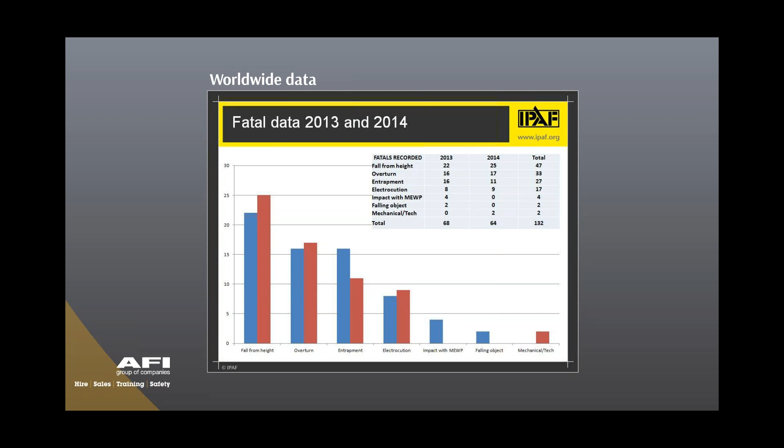Drilling down into the data, you can see that on entrapment, the biggest issue was on 3B, or mobile type booms, so it's probably no surprise to you. The next one is 3A, sort of mobile vertical, or what we commonly know as a scissor lift. And we had an issue, a couple of issues, on a 1B, a static boom. There's one there to be confirmed, so I'm not sure what that was.

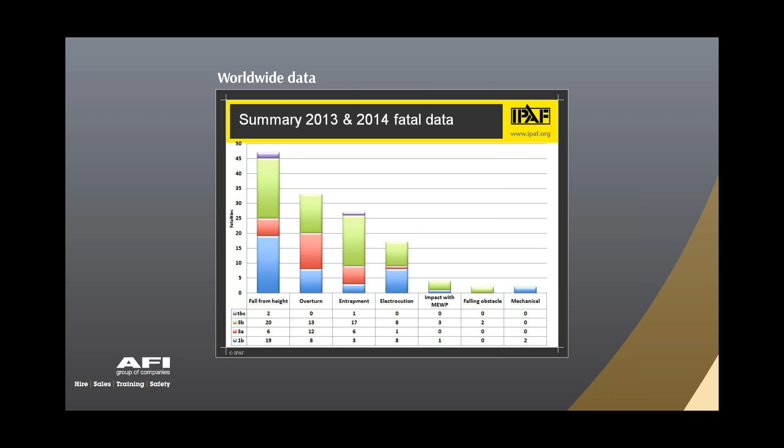But again, if we look to the left, still the biggest issue is falls from height, predominantly from boom type platforms, both mobile and static, and a number of overturnings. So albeit we have big issues with entrapment, there are certainly other bigger issues in terms of falls from height and overturns. But every one of them is obviously a catastrophic day and a changing of lives.

Okay, so just a little bit about the regulations we have to adhere to here in the UK. PUWER and LOLER. PUWER requires that the work equipment provided is suitable for use. Now employers have a duty to identify potential groups at risk. We have a lot of very experienced people in this industry who use MEWPs day in, day out. And equally, we have a lot of people very experienced in their trades who use MEWPs on an ad hoc basis, maybe once a week or once a month.

Who's more at risk? You may want to ask this later, but in one sense you could say the guy using the machine every day, a steel erector for example, is going to be more competent, but he can also be more complacent because 'it's never going to happen to me.' Even recently we've had an incident with a steel erector on a boom type platform fitted with a secondary guarding device. So there's no golden ticket that's going to get you out of this. You need to be more aware.

But we know the employer must carry out their risk assessments, and we need to ensure that any risk created by the use of any equipment, the MEWP, and the location where we are, is protected by a combination of guarding, protection devices, warning devices, and of course safe systems of work, training, and risk assessments.

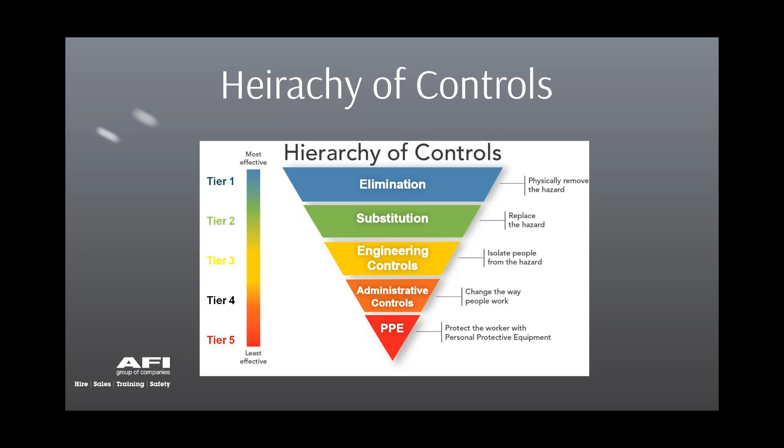So tier 1 and tier 3, I will discuss these a little bit later on.

I mentioned some guidance, and this guidance from the Strategic Forum Plant Safety Group is the document on the left there, freely downloadable from many websites. It's a very practical, helpful and easy reading piece of guidance. Part 1 is for supervisors and managers and those looking after and particularly selecting people for working up in the air, whereas Part 2 is more tuned to looking at rescuers and operators, those who are working in the platform.

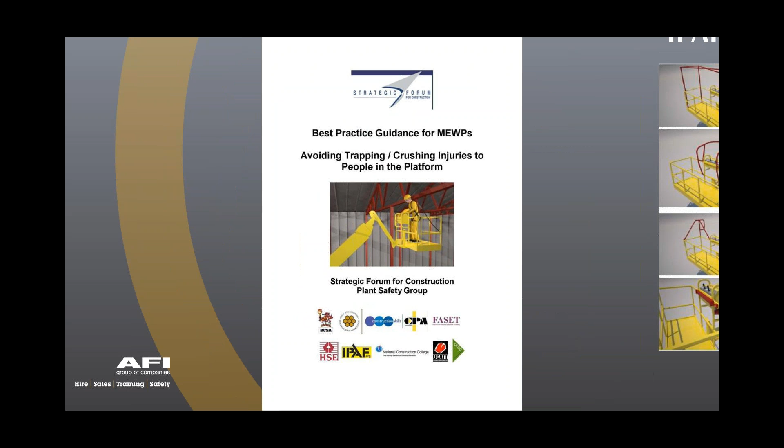IPAF themselves have produced a number of other documents which you'll find on their webpage under the resources and technical guidance notes section. I would encourage you to review these. Here's an example of one of the guidance documents they've put together, because we have to let people know what these are about. These will again be available at the end of the presentation.

I'm just going to bring to your attention an incident which happened over at the Boggabri coal mine in New South Wales, Australia recently. This happened in 2014, at a partly constructed steel building, and the report was issued in 2015. I think this is testament to the work of the Mine Safety Investigation Unit, that they've investigated or partially investigated this so quickly. We see too often in the UK where it takes four or five years before we get any sort of tangible findings from incidents. Unfortunately, by that time we've put a lot of people up in the air and used a lot of equipment, and it could happen again.

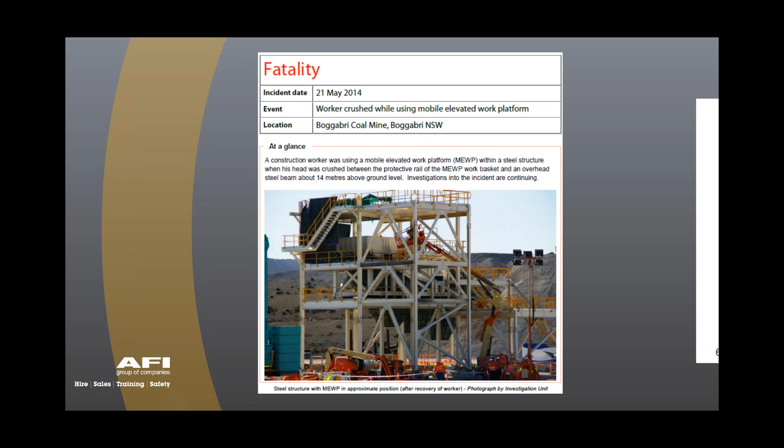So this picture here shows the aftermath of the incident, and you can see the platform around about 14 meters up in the air. As it says there, investigations are still ongoing.

Here we've got the basket after it had been released, and you can see these two beams here, which is unfortunately where our deceased worker was fatally injured, as you can see there.

So basically the operator was tightening bolts up inside the steel structure. A mobile compressor was at the base running air lines up to the landing platform just below the MEWP. Flexible hoses were then conveyed up to the platform, and he was using a heavy pneumatic impact wrench. The contractor themselves had instigated procedures, and they'd insisted that a spotter was put in place to control the identified risk of being crushed between the MEWP and the overhead structure.

Now, at the time of the incident, the deceased was last seen standing in the MEWP basket with a small distance between the deceased's head and the beam. Shortly afterwards, unfortunately, the deceased was seen with their head caught between the steel beam and the safety rail at the front of the platform. All right, so this is this bit here. Forgive my drawing there, and their head was caught in there.

Now, it is appropriate to state that I'll just clear this. It was appropriate to show you the position of the worker at the time.

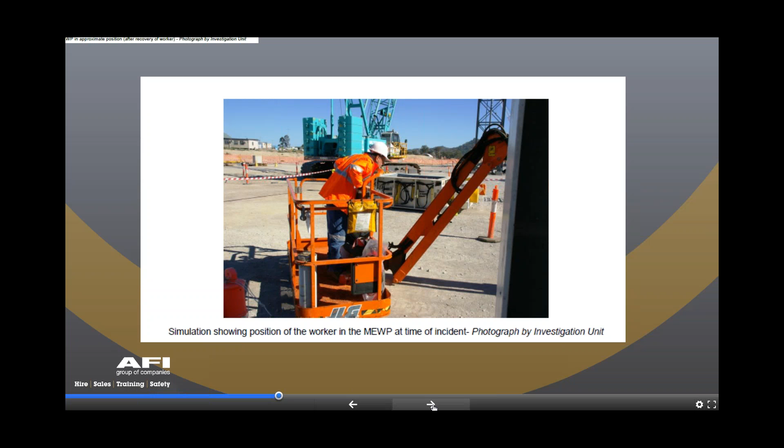So let's go on to secondary guarding devices then. There are two main types of secondary guarding devices available for boom type MEWPs: physical and pressure sensing devices.

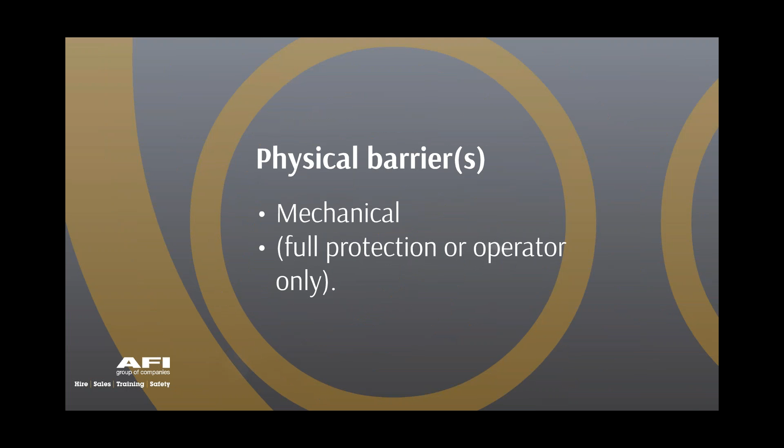Physical devices give full protection for either the operator or the whole platform, and that's what we call a mechanical device. Whereas the other type is pressure sensing devices. Now there are two types here: electronic interface and electronic. Those two devices are quite simple, quite straightforward.

So, mechanical secondary guarding devices. If we remember what we talked about earlier, tier 1 being elimination, this is what would be considered elimination: a steel structure that prevents the operator from being crushed. Simple, strong, extremely reliable, they can be reused, and these devices generally project above the machine platform to protect the operator from crushing, which can obviously still lead to serious or fatal injuries.

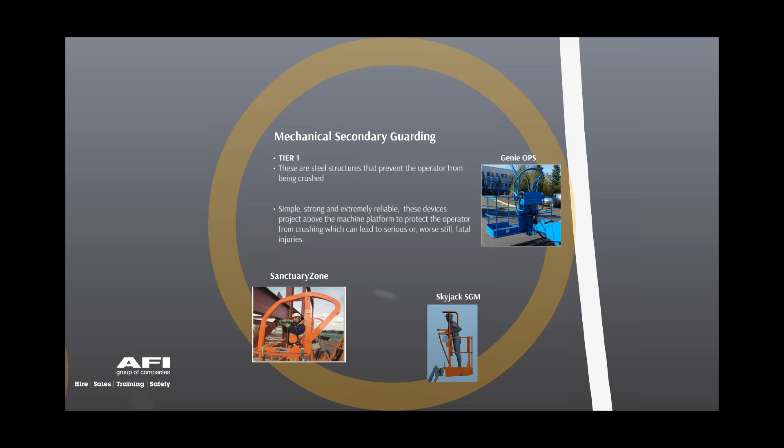Most of these, with the exception of Sanctuary Zone, have been designed by the MEWP manufacturers themselves. We've got two manufacturers that have seen the benefit in designing a tier 1 device. Again, if we look at the hierarchy of control, these prevent the crushing. The advantage, like I said earlier, is they are strong and there's no electrical interaction with the machine. The only downside is that you're adding a little bit of weight to the platform, but what's that when we're taking into account something which protects him?

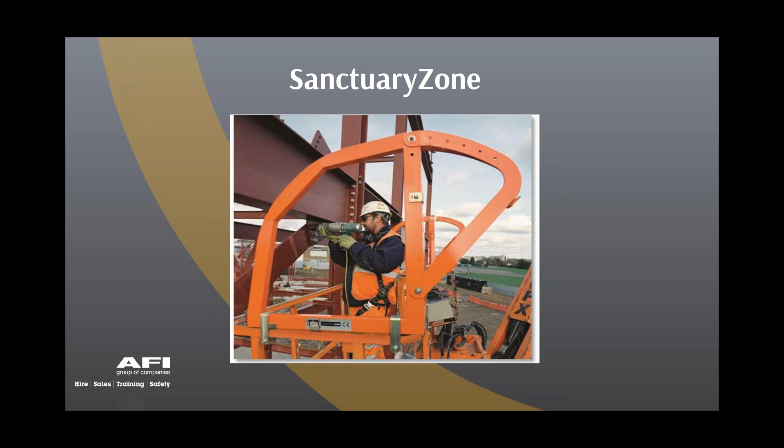So you can see a steel beam there, right? You see the operator working. You can just imagine the similar incident that I've just shown you in the mine, and the guy's leaning forward, looking where he's going, and unfortunately makes contact. The Genie OPS, or operator protection structure, simply there, that's for the operator only, so he stands inside his own sort of enclosed area. And the Skyjack SGM, Skyguard Mechanical, you can see a similar sort of thing. The picture only shows it from sideways, but the same principle applies, it's very similar, just in a different design.

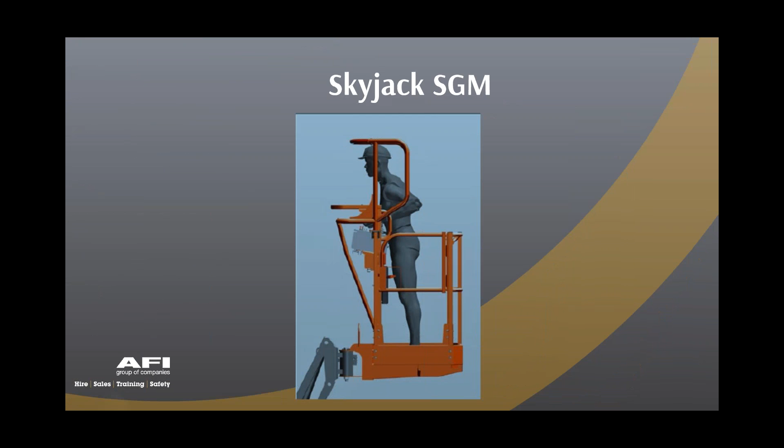So tier 3 now, we talked earlier about this being engineering control. These are interactive types of devices which will react to a crushing scenario. The operator themselves is pushed onto a bar which either stops the function, or auto reverses the last operation. Sometimes we have a fixed bar, sometimes a movable bar. These will not always preserve the physical integrity of the operator. Depending on where we're going, we still have to be forced onto this bar for the thing to work, so we're going to sustain some injuries.

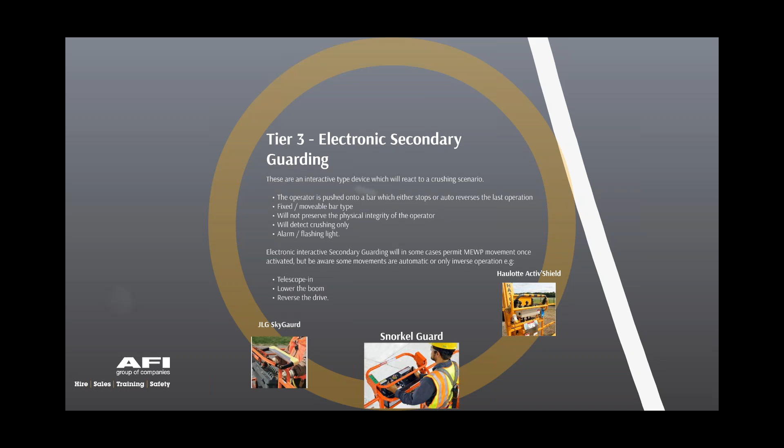These will detect crushing only, and in these scenarios the machines will either raise a sound alarm or have a flashing light. Flashing lights do vary - sometimes it's underneath the platform, sometimes at the base. Now, electronic interactive secondary guarding will in some cases permit MEWP movements once activated, but we have to be aware that some of these movements are automatic. So if I'm reversing back and I strike the bar, it automatically drives forward. But sometimes they will only do the inverse operation, the reverse - so if I'm lifting up, it will only allow me to lower down.

So we can see the JLG Skyguard there. It's activated by approximately 23 kilograms, or 3.6 stone, of force, and this will stop all function use at the time. After stopping the machine, the control system automatically assesses the functions in use by the operator at the time of activation, and for a short period of time is able to reverse that sequence.

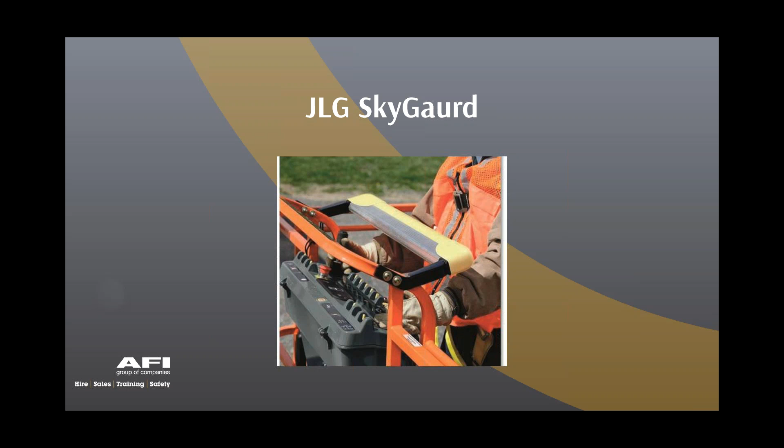Active Shield by Haulotte. This alerts the operator to potential crushing and features a safety gap that can protect the operator from entrapment over the controls and potentially allow them to get out of danger. Following the alert, only reverse or lowering movements are permitted. So that's what we talk about in burst movements, allowing a possibly panicked operator to get out of trouble without making the situation worse. After it's been triggered, the system is then able to reset and be reactivated from the platform.

Snorkel Guard, this is the latest device that's been released, and Snorkel actually contacted me when they heard I was doing this webinar - they were very, very keen to promote this. It's designed by the in-house Snorkel engineering team. It's simple, a mechanical system that features a spring-loaded rail that sits above the upper control panel, which cuts out machine operations when compressed.

So basically, this is for when an operator is pushed against the controls. The operator can override Snorkel Guard using a switch in the platform, and in the event that it's activated in error - say I've leant on it - I can just reset it. Now it's my belief that Snorkel are one of the only manufacturers to introduce this type of mechanical system as a standard feature on their new equipment.

All right, so tier 3, now known as electronic secondary guarding. So we've had electronic interactive, now I've got electronic secondary guarding. This works by the operator being forced onto a bar or a sensor bar, which in turn stops the MEWP. Now the MEWP is in some cases unable to reverse the last operation, meaning rescue from the ground is the only option.

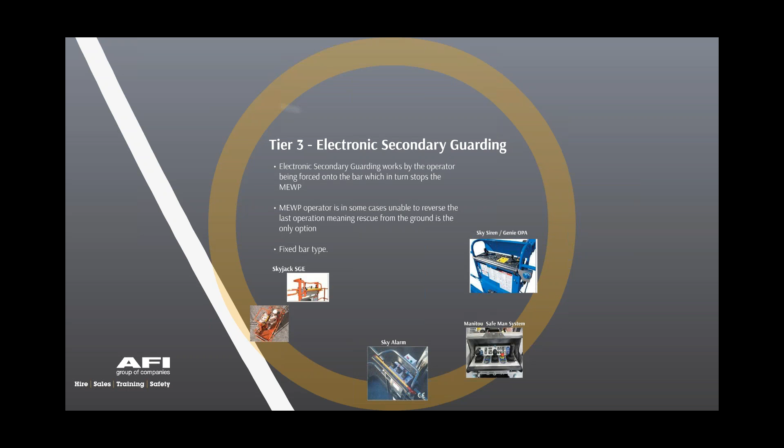And of course, this being probably the most sensitive of the devices, it can lead to false alarms with some machines. So basically I've turned around, I've not isolated the machine, I've rested on the actual control, and as you can see from some of them, they are very easy to trip.

Okay, so the SGE system features a sensor bar that when pushed instantly stops all machine functions, initiates a siren and a high intensity flashing beacon. If the bar is released within a second, the siren and beacon will cease and the selected function can then return. But if I apply it for more than a second, they will continue to operate and the engine will stop, halting all functions until the machine is reset. So completely different to what you've just seen on the interactive devices.

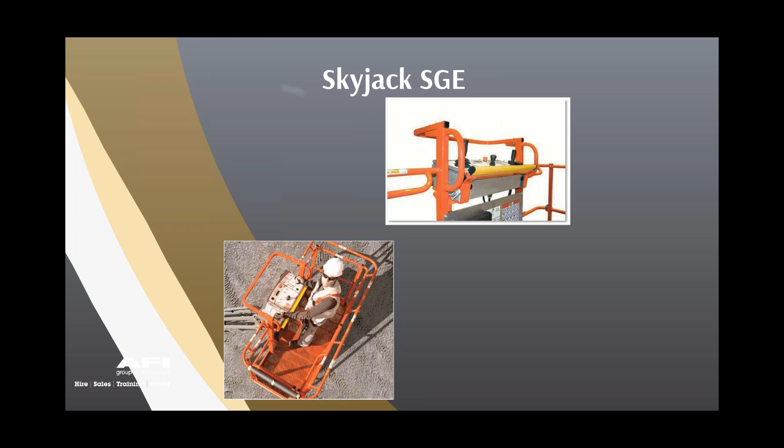The Genie OPA, or Sky Siren, this system was designed to be as unobtrusive as possible and features a pressure-sensitive horizontal bar that is fitted at waist height below the control panel. When pressure is placed on the bar, the system is activated. As you can see, there's a reset button that can be pressed if the system is inadvertently activated or touched in error.

Now, this system can be retrofitted to any Genie articulating or telescopic boom lift manufactured after 2002. So if you've got any platforms that are older than that, unfortunately this cannot be fitted to it.

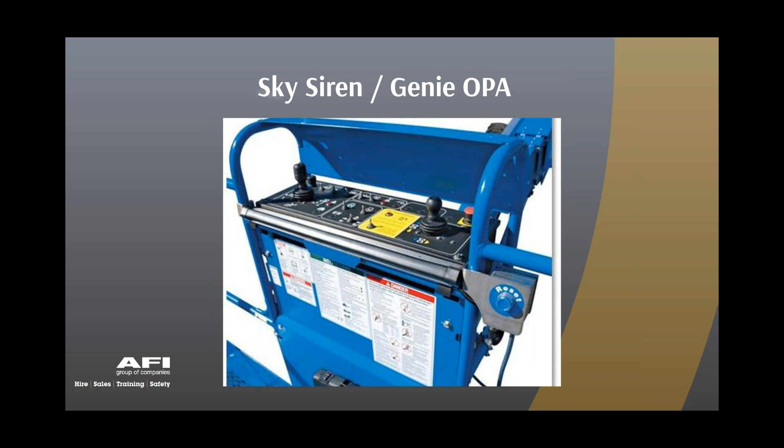Sky Alarm, designed by another rental company, and you can see that here. All right, so a bit like a black strip there going along it. Okay, and you can see that protrudes even further than the last one. And Manitou's Safe Man System. Okay, so again, similar sort of black strip there at the very bottom. Okay, so you can see there's 4 different types there. We've got 3 different types of electronic interactive, and we've got 3 different types of mechanical. So we've got the tier 1s and the tier 3s.

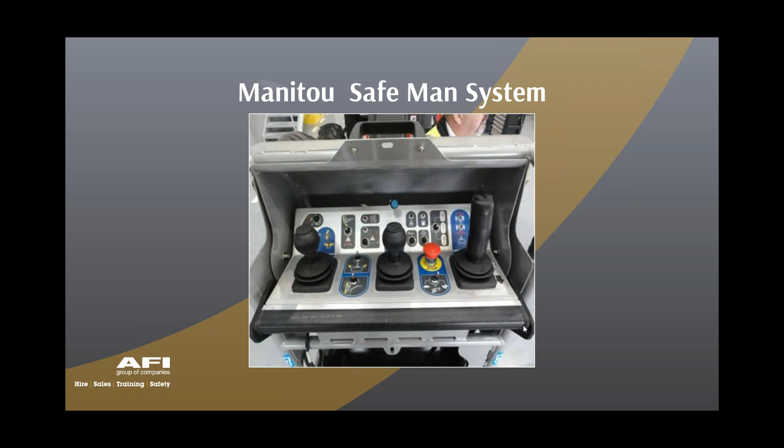Okay, moving on now, we've also got another type, which is the electronic control panel detection type. And Niftylift themselves brought out SiOPS, Sensitive Intelligent Operator Protection System, took it to a different level, and the whole panel itself will move down. So if I'm forced onto that panel by striking something behind me, that's going to force down and prevent me from hopefully being crushed.

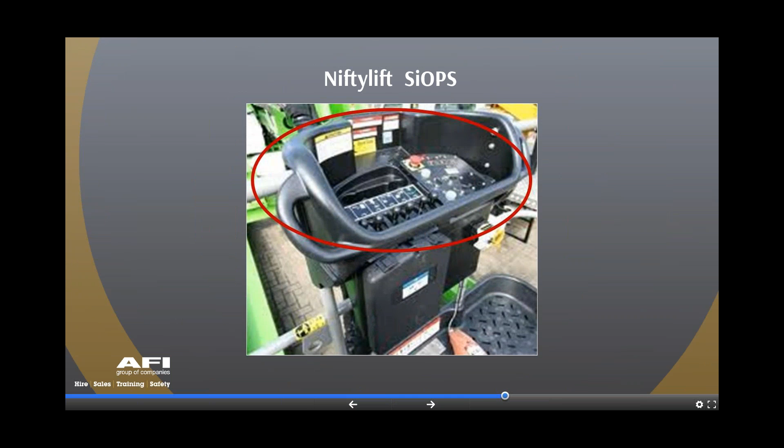So some of the secondary guarding devices and equipment that I've just shown you there are fitted to the MEWPs by the manufacturer during their MEWP assembly process. Some of them are standard now, you can buy them. And as such, these are an integral part of the original machine design and certification.

I have found principal contractors wrongly assuming that they can fit a SkyGuard to a Genie, or an Active Shield to a Skyjack. You can't do that. They can be fitted to manufacturer machine specific only. The only device which has multiple manufacturer approval is Sanctuary Zone. Only device, okay? So just be aware of that.

You might favor one, and I'm not here to promote anything. I'm here to tell you what these devices are and what is available. They might well favor one, but you go and hire a machine from a rental company and you might not necessarily get the same device again. So there's issues with familiarization, rescue potentially, those sort of things.

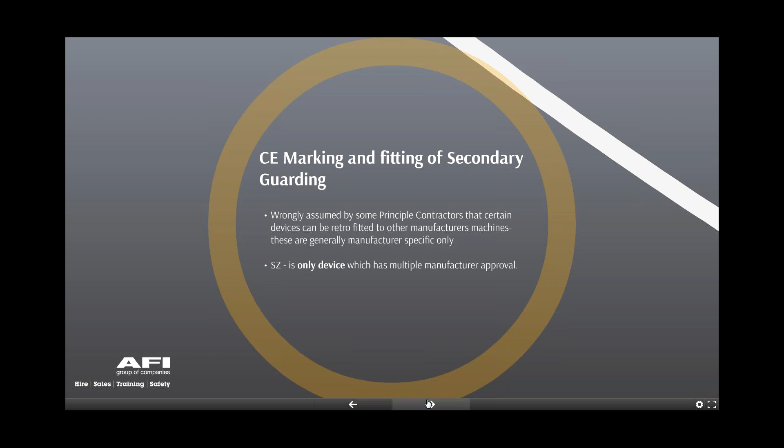So guidance is available in terms of if we actually fit an additional device to an existing machine. So it is recommended that those intended to fit or use a device refer to the Strategic Forum Plant Safety Group on Part 1, Section 6, fitting additional devices or equipment to MEWPs. And it talks about risk assessments and the legal requirements, the machinery directive, provision and use of work equipment regulations.

We've got to have signage and decals to tell us what's what, etc. So not going to go too much into that, you'll be pleased to hear. But once we've fitted this to this machine, okay, you're taking responsibility. So certainly as hirers, I wouldn't suggest any of you start fitting these things to other machines unless you've had specific machine approval. And obviously, ensure you've got it from the rental company.

So uses of secondary guarding. Okay, so let's not forget what we talked about earlier. We have the Health and Safety's Field Operations Directorate. Basically, if they see a potentially crushing scenario which is not being effectively managed, they can obviously look at prosecution, and clearly that might be, for example, fee for intervention or something like that, or even prosecution itself.

So some examples of where we would potentially need secondary guarding. The list potentially could be endless, but clearly when it's client policy or part of somebody's group practices. For example, UKCG has just become Build UK. UKCG, very good at putting together documents, okay, and they put together the MEWP toolkit. So we've got examples of what they would expect their supply chain to adhere to

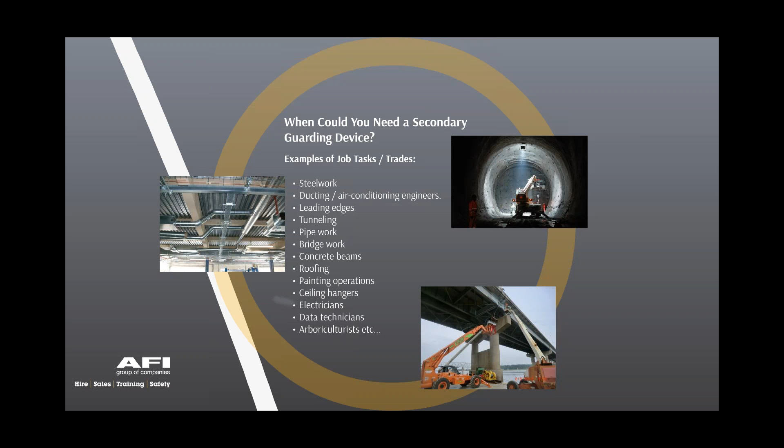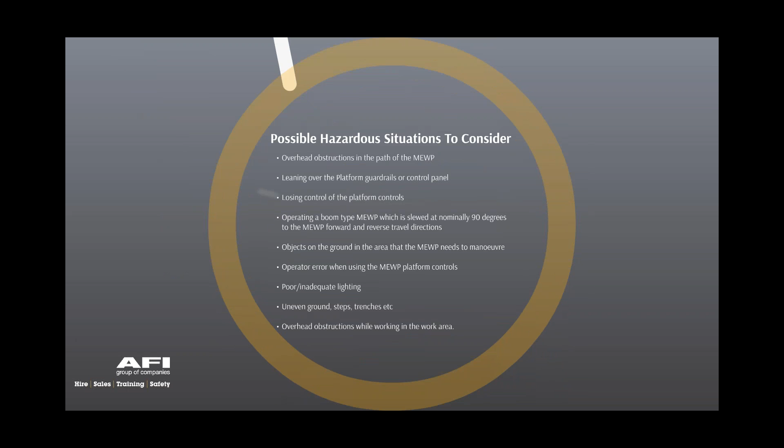So if we look at the Boggabri coal mine incident that I mentioned earlier, they came up with some recommendations and potential hazardous situations, but certainly things that we need to look at here. So for example, when we're looking at overhead obstructions in the path of the MEWP, potentially not looking where we're going, spatial awareness, we don't understand the dynamics of the machine, etc.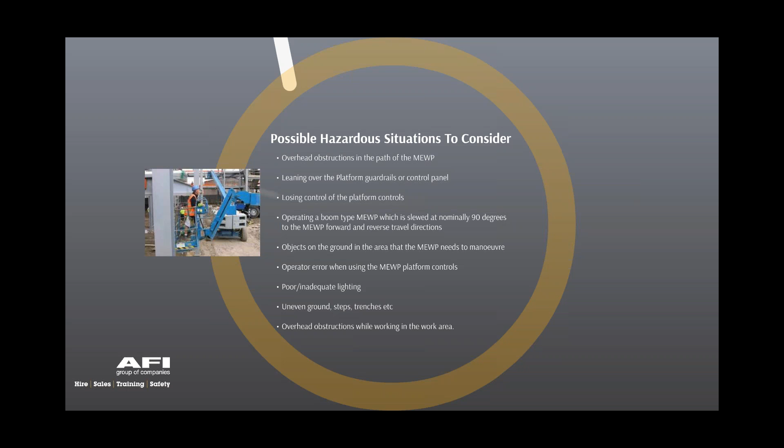So if we take into account looking down, operator error, operating the wrong control, not being able to judge distance, situational awareness, as you can see in that picture there, other platforms working, cranes, fork trucks, etc. What if I've got beams or steel work or ducting, etc. I've got cables, I've got various things in the platform, and even situations here where the operator on the left or on the right has to lower down to a safer height to clear obstructions, but often they'll just travel elevated and hopefully they'll get away with it.

What about disorientation? So operating the machine 180 degrees to the chassis. So I'm the wrong way around. So normally 90 degrees slewed in the opposite direction. I operate forward and the machine travels in reverse.

Objects on the ground in the area the MEWP needs to move. So I have to drive over something or clear something. It could be a curb, a 4-inch curb. It could be a block. It could be a piece of timber. Lighting inadequate, obstructions overhead whilst working in that area.

One thing I'll mention there as well is ramping up and down. Okay, so what if I forget that machine's got a ramping time? So ramping up and down and not getting into the right area, slowing down, and it moves actually faster than I realised.

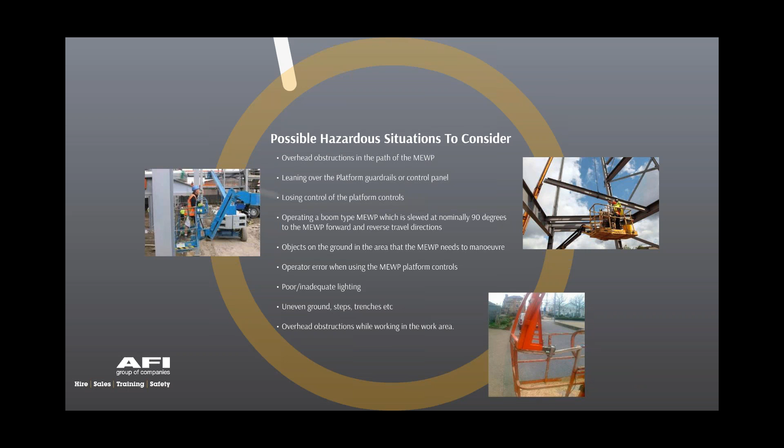All right, well, the safety manager from there said to us, I don't care what damage we do to your platform as long as my operator walks home, and he's more than prepared to pay for the damage there. In this scenario, it wasn't the operator's fault. It was the boat that moved, okay, and it made contact with the actual corner of the platform, as you can see there, bending the platform guardrails in. Very lucky man.

So as previously noted, we've got quite a few secondary devices that are out there, all right, but the HSE and the Strategic Forum Plant Safety Group have actually stated there is currently no one particular secondary guarding device that will prevent entrapment in all known circumstances. So there's no golden egg here. You haven't got one device that's going to stop you in any known potential incident.

So therefore, the following 5 points should be considered as part of a risk assessment process, to assist employers in selecting the most appropriate secondary guarding device. Reasons for selecting the MEWP for the intended work. Foreseeable entrapment situations. Different types of secondary guarding devices available, their suitability and their compatibility with the selected platform. Additional hazards, compared against the potential benefits that may be gained from introducing a secondary guarding device. And of course, the need for familiarization of operators and rescue personnel.

Remember, let's try and make this rescue commonplace. How many times do you walk past a MEWP up in the air and there's maybe somebody stood nearby? Just say to the guy, can you show me you can get that machine down? And if he's standing there scratching his head thinking, where do I start? You've got a problem. Right, because if you read the guidance that I mentioned earlier, it's going to give you a good insight into the time that you need to react to get somebody down safely.

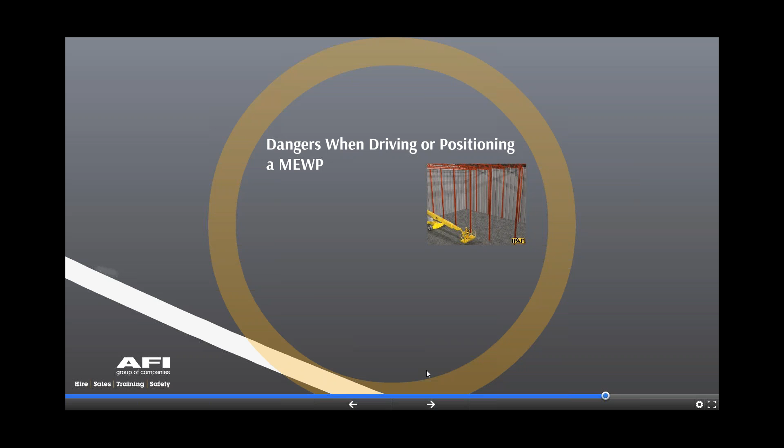Recently, I put together a HSEQ bulletin, and I wrote the article on the new EN 280 standard. Anybody who's ever been involved in rescuing a workmate or a colleague from a stranded platform or involved in a serious incident will know that practicing the emergency lowering controls is essential to ensure that this will be understood. But to add to this, some manufacturers have now stated that their emergency lowering systems do not need to be function tested prior to use, and they will self-check.

So not forgetting, of course, if we've got secondary guarding devices fitted, and this is why I'm getting onto this, we need to ensure that we understand how that secondary guarding device will impact on the use of that MEWP. And that's very important.

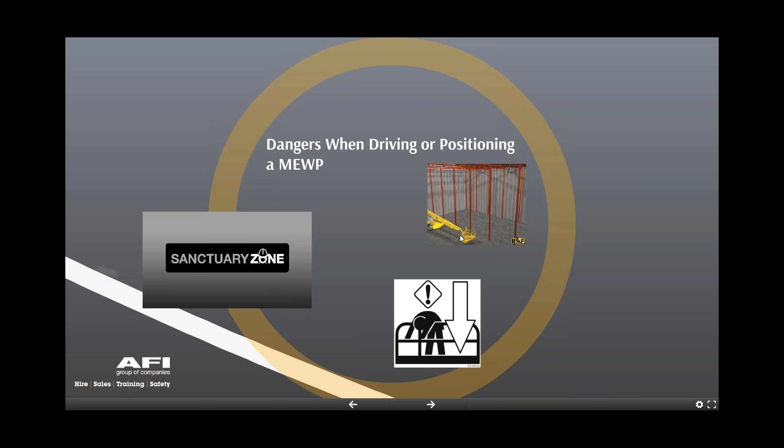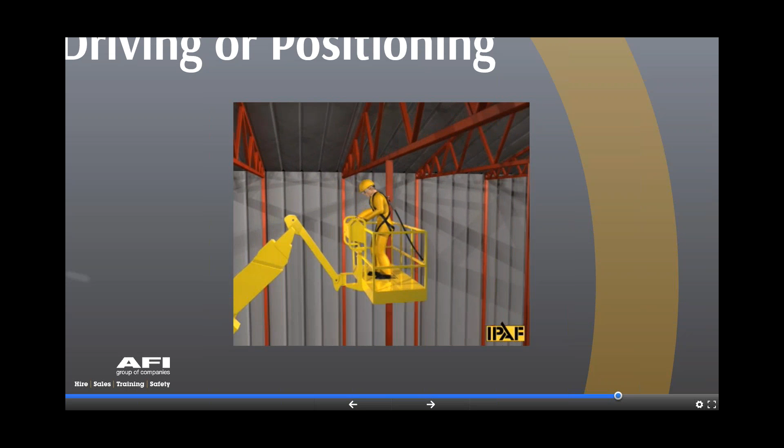So just to show you a brief film here. Operators working away, as ever, they often get very much fixated on the controls, and unfortunately he's pushed onto the controls there and he's unable to release himself.

Okay, so the rescue scenario: if it's got electronic secondary guarding devices fitted, how is that going to impact? Is it going to override the ground controls? Is there other ways I can get the machine down? There are things that you need to consider, and clearly making sure that you understand the manufacturer's instruction manual.

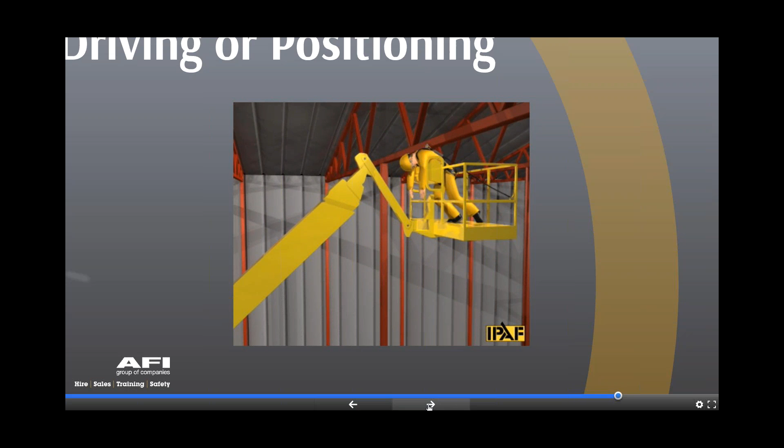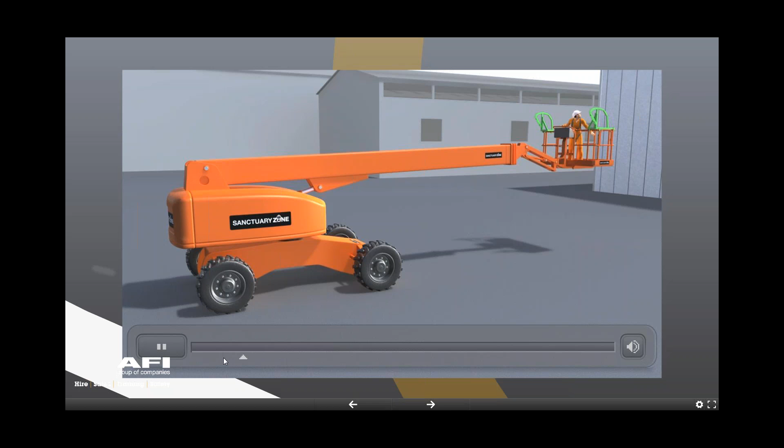Let's turn the sound off there. Not my kind of music.

So he's driving into a building. Forgive the name on the boom there, but this is just for dynamics. This is why I'm showing you this.

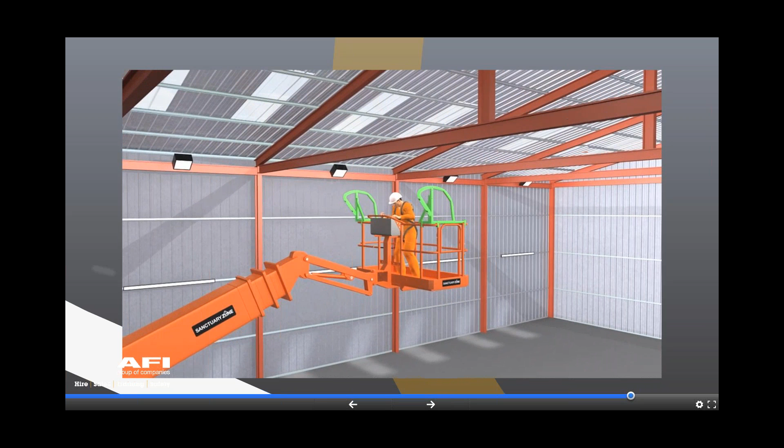So same scenario, this time fixated on the controls, and he makes contact with the secondary guarding device. You can see the beam here, and you can see the gap that the person has actually got.

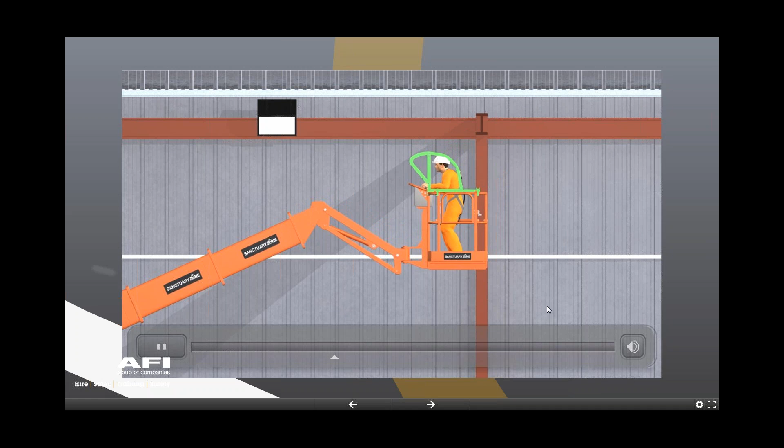But we always think that the issue is going to come from above. What we sometimes don't always consider or factor in is that it might not necessarily always be from above. So the impact may come from different areas.

So a boom traveling at its elevated speed of 0.61 miles per hour will travel 10.73 inches in 1 second. But the same boom folded down and in the transport position will travel 52.8 inches in 1 second. So a colossal difference there.

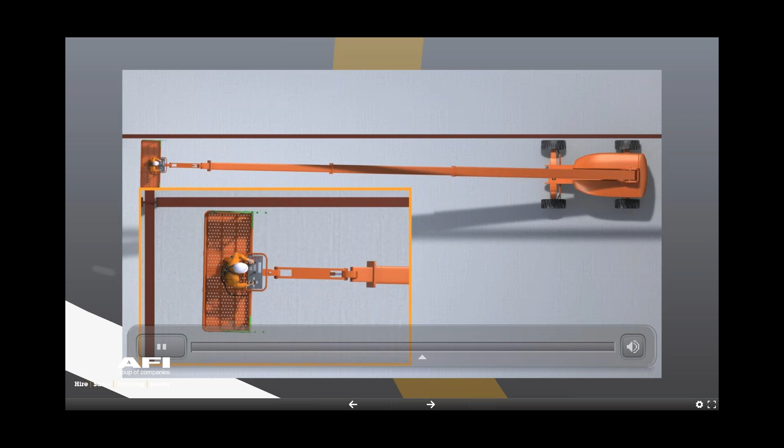Kind of an indication there of the ship incident that I mentioned earlier. In this case, unfortunately, or fortunately, he stopped. You can see now he's gone up and over a mound or a curb or something like that.

So an 85-foot boom elevated at around a 45-degree angle at full outreach, which then drives over a 4-inch obstacle, will raise around about 40 inches in 1.23 seconds.

So the scenario here is having no secondary guarding, and you can see the potential there. I mentioned earlier that we always normally consider being forced over the controls, but unfortunately people often forget there are other ways that we can be impacted.

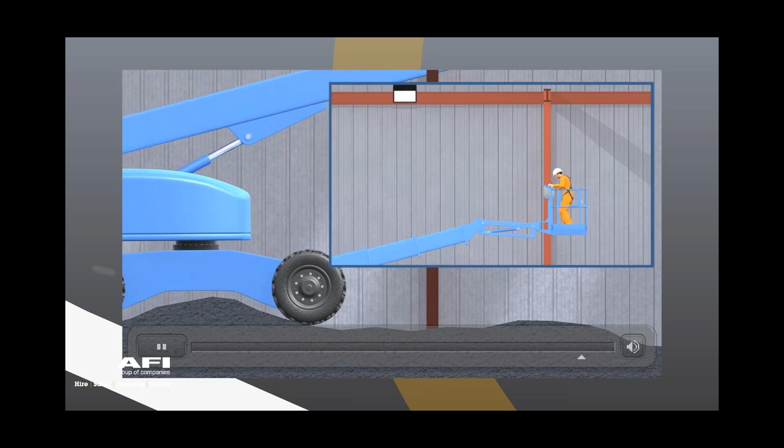And for me, this is one of the most harrowing ones here. We think of the fact that we are now going over something like a 4 or 5 inch obstacle, and the effect and the actual rate of climb on that platform will be phenomenal to the operator.

So what industry did then was in 2012, Skanska themselves introduced mandatory secondary guarding on Type 3B machines across their supply chain. They were one of the first to mandate secondary guarding on MEWPs, and most of this has effectively affected their supply chain.

And we then found that other main contractors soon followed suit. Some main contractors then followed the advice of the UKCG, or what we know as Build UK's MEWP toolkit. As we've seen, a number of devices have now become available, and it's also my understanding that there are devices now being developed for vertical type MEWPs too.

So secondary guarding is mandatory on most main contractor projects. The device must be manufacturer approved. We've got to take into account the MEWP Safety Forum guidance, and we must practice our rescue, rehearse, and ensure our emergency procedures are critical to understanding how that secondary guarding device impacts on the use of the MEWP.